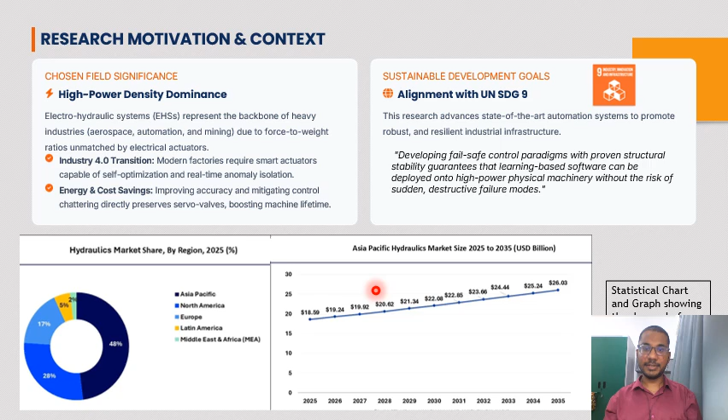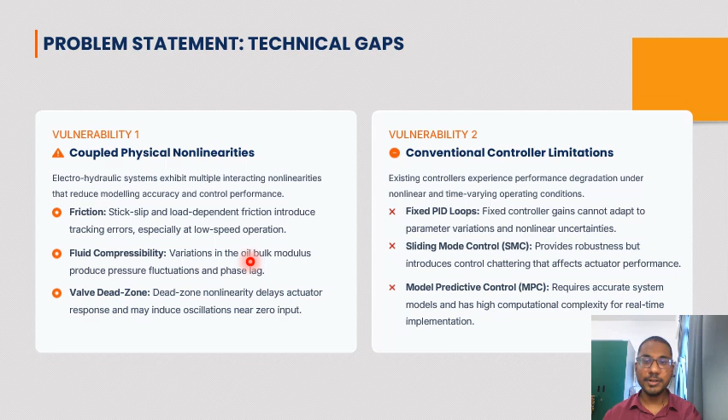The problem statements that have been identified in terms of technical gaps are the coupled physical nonlinearities in electrohydraulic systems, which include friction, fluid compressibility, and valve dead zones. And in terms of conventional controller limitations, fixed PIDs cannot adapt to parameter variations, sliding mode controllers introduce chattering, which affects actuator performance, and model predictive controllers require an accurate model and have high computational complexity for real-time implementation.

The problem statements identified in safety gaps are the lack of formal stability guarantees, which is the limited stability analysis through Lyapunov-based stability proofs, the risk under uncertainties of parameter variations, and idealized assumptions which may not hold in practical applications, as well as the simulation to real deployment gap, which addresses the real-time implementation of the controllers, the hardware integration of the controllers, as well as the already available yet limited experimental validation.

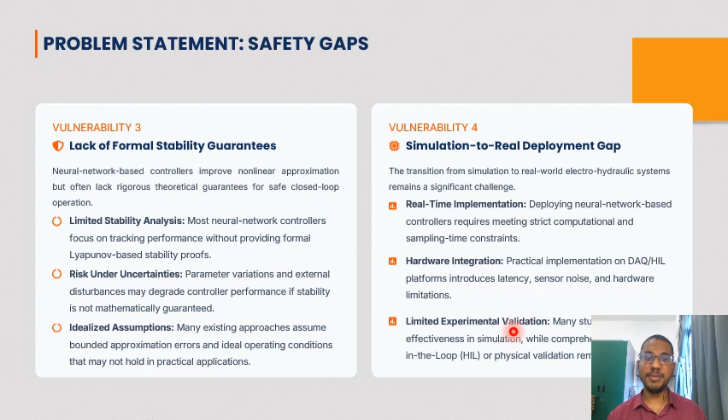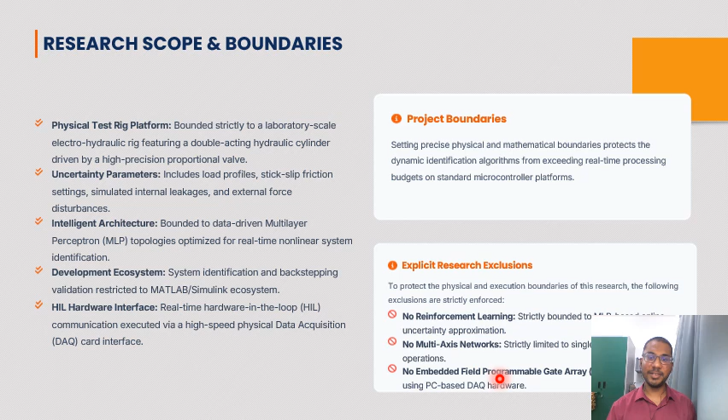The research scope and boundaries of this research will be focused to the physical test rig platform provided, the uncertainty parameters which will be measured, the intelligent architecture of the controller, the development ecosystem, in this case MATLAB or Simulink, as well as the hardware interface that is provided. And the exclusions of this research are no reinforcement learning, no multi-axis networks, and no embedded field programmable gate array, or FPGA.

Among the questions asked throughout this research is how can the controller structure be designed and trained to capture the nonlinearities under various profiles? How can this structure be mathematically proven via Lyapunov theory or stability theory, and whether this neural network can minimize tracking delay and suppress the chattering on the physical devices. And in terms of the hypothesis,

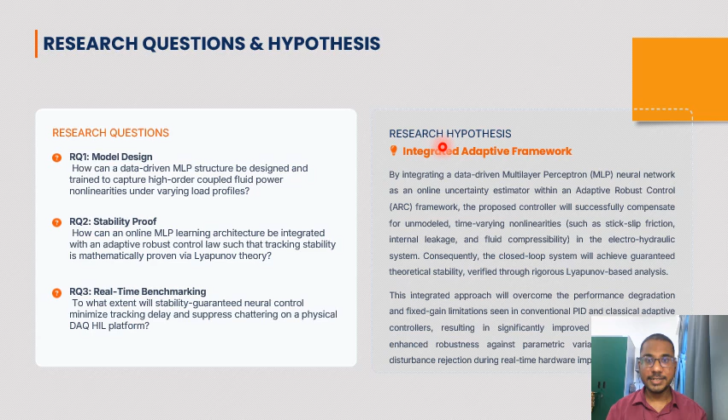Among the objectives of this research is to develop the data-driven neural network dynamic model, to design the control framework which is mathematically bounded to the approximation errors and system stability, and most importantly, to experimentally validate the controller using the physical test rig and compare it with the standard PID and classical SMC.

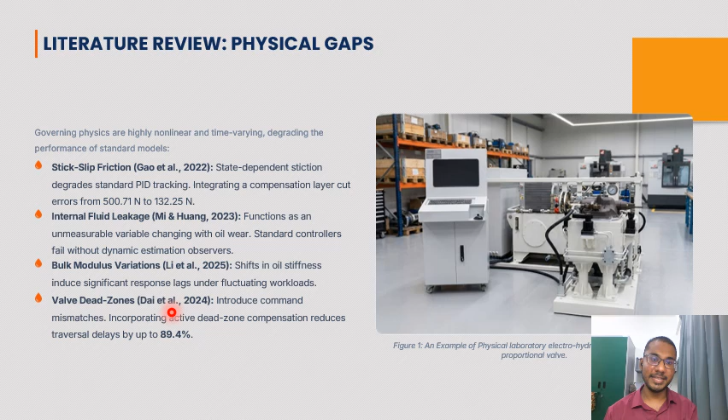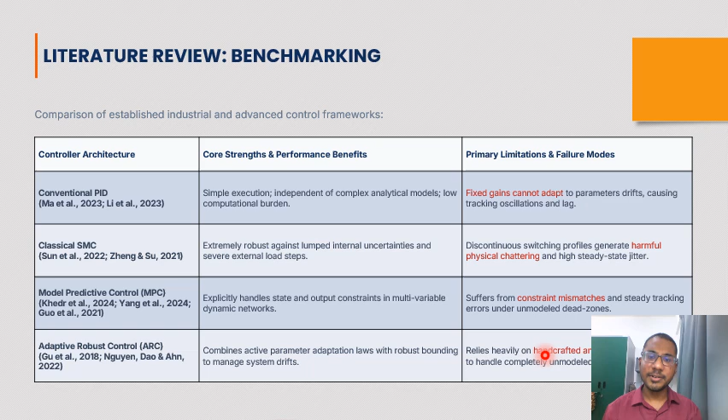Among the physical gaps identified throughout the literature review are the stick-slip friction by this study, the internal fluid leakage carried out by this study, the bulk modulus variations by this study, focusing on shifts in oil stiffness, and of course, the most important, valve dead zones by this study. Based on this literature review, the conventional PID lacks adaptability towards parameter changes. The classical SMC models introduce chattering to the systems. The model predictive controller contains mismatches, and the adaptive robust controller requires handcrafted analytical models to carry out its function.

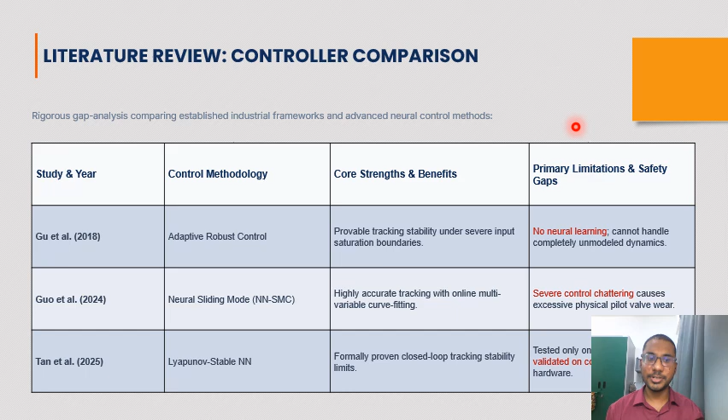And this is the controller comparison from the literature review based on the types of controller methodologies, their core strengths, and their limitations as shown here. Based on the literature review, here is the K-chart that I have developed, which addresses the research gap, which shows that there is no unified framework which integrates MLP-based learning, Lyapunov stability guarantee, adaptive robust control, and real-time physical validation.

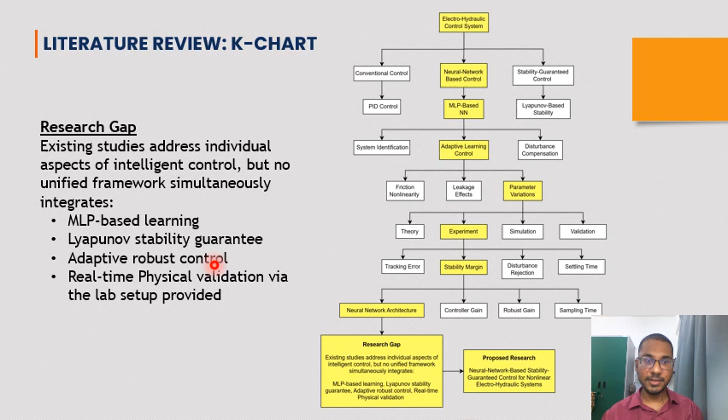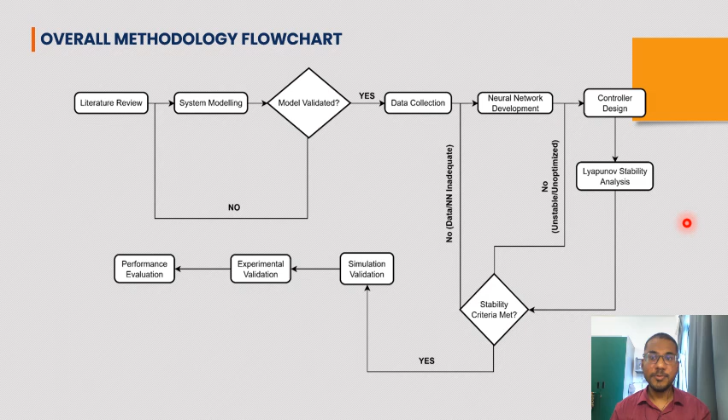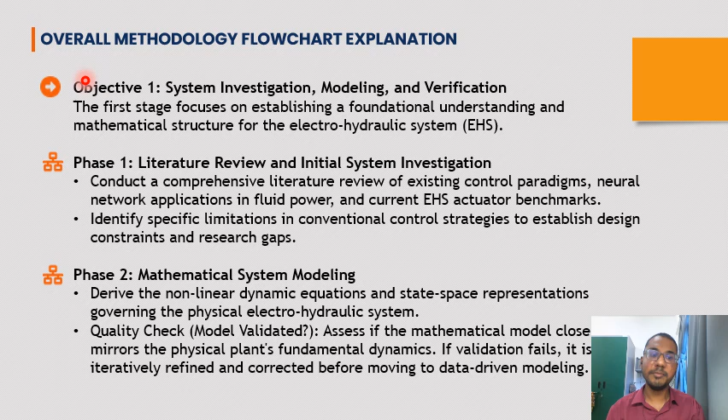This is the overall methodology flowchart shown here, which is separated into 6 unique phases, which cover the 3 main objectives. To fulfill Objective 1, first we do the literature review and initial system investigation to identify the limitations of control strategies, to establish design constraints and research gaps, and then we develop the mathematical system modeling, which is then validated to ensure that it is correct, and if it isn't, it is refined and corrected before moving to data-driven modeling.

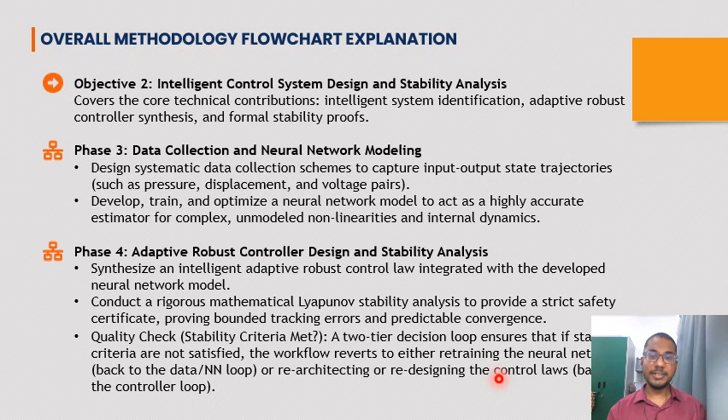To fulfill Objective 2, first we carry out the data collection, and then we develop, train, and optimize a neural network model. Then from this neural network model, we design and create the controller, which will then be run through Lyapunov stability analysis. If the stability criteria has not been met, we either redesign the neural network model or we redesign the controller itself before going to the next phase.

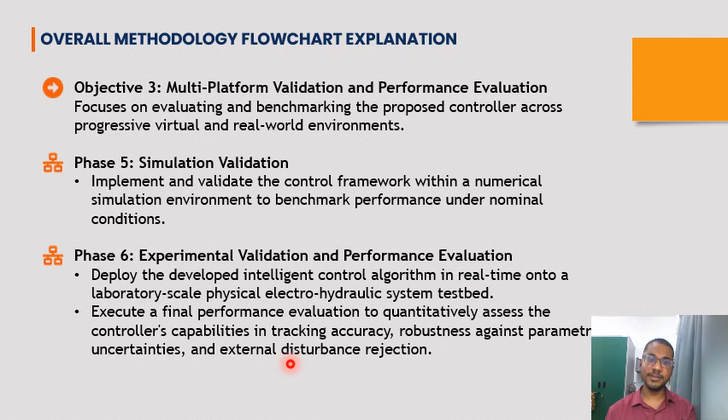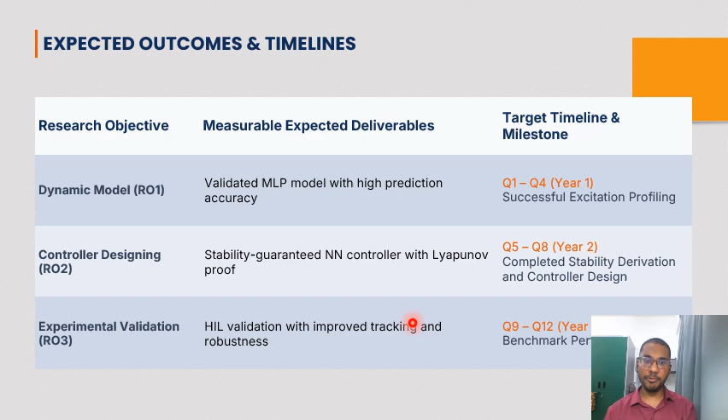And finally, to fulfill Objective 3, we carry out a simulation validation to validate the created framework under nominal conditions and an experimental validation to assure the real-time functionality as well as assess the capabilities in terms of tracking accuracy, robustness against uncertainties, and external disturbance rejection. Among the expected outcomes of this research is a validated model with high prediction accuracy, a stability guaranteed controller proven through Lyapunov theory, and a validated controller with improved tracking and robustness.

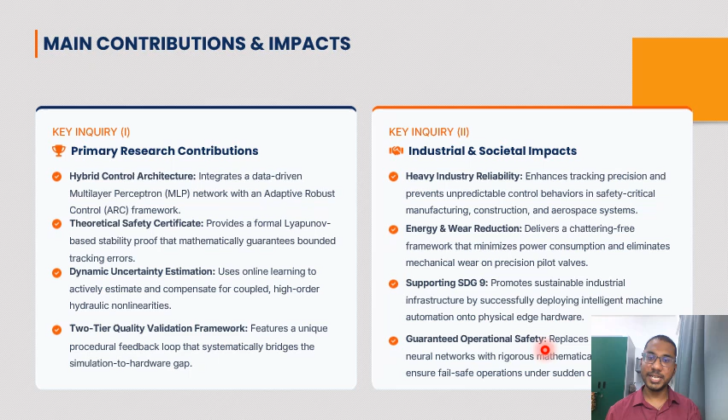In conclusion, this research addresses the absence of formal stability guarantees in standard intelligent control architectures. This framework aims to deliver an efficient controller that enhances operational reliability and energy efficiency in high-power industrial automation systems, which supports the Sustainable Development Goal 9 by the United Nations.